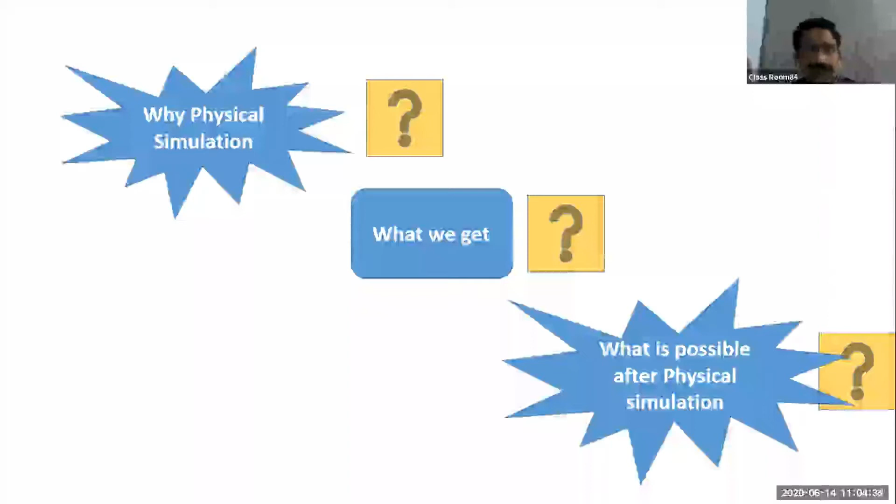First of all, I am trying to convey the information regarding why physical simulation is important and what exactly physical simulation is. Because we are all aware of FEM simulation and other kinds of simulation, but few of us are familiar with the term physical simulation. So what is the need for physical simulation?

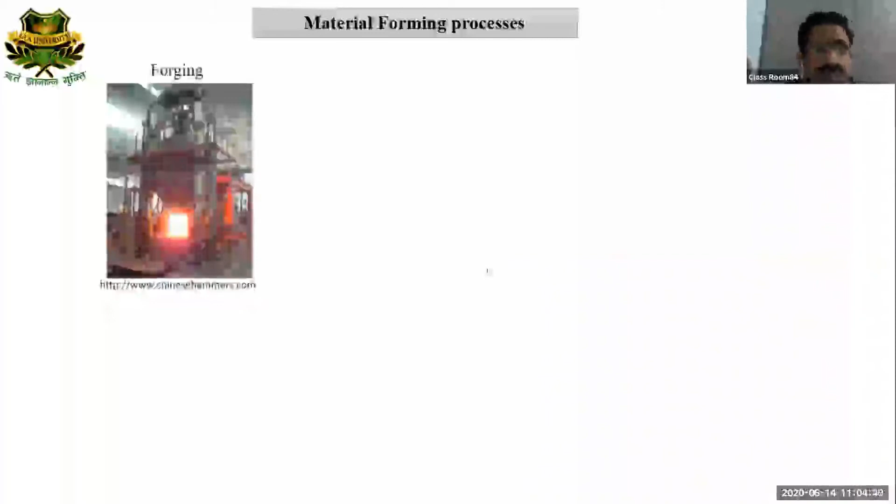On the left side, we can see a picture which shows a forging experiment at a shop floor. There is a very huge power press providing a large force on a very hot red billet. Generally, forging is used to break the as-cast structure of the material to make it a very fine structure. When we break the dendrite structure formed in casting, to enhance the mechanical property of the product, we normally go through forging.

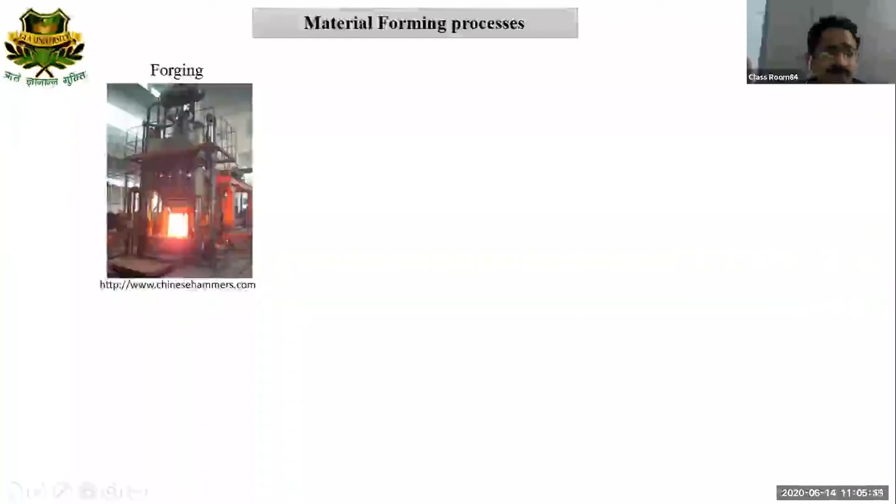In this picture it is very clear that there are a few terms: the temperature of the billet, the amount of force, and the speed of the force provided during forging. Now moving towards extrusion. Extrusion is also a metal forming process wherein we apply a force and pass our material through a die to change the dimension or shape of the material. Here again temperature is the main parameter, force is a main parameter, and the speed at which you extrude the material, known as the strain rate, is also an important parameter.

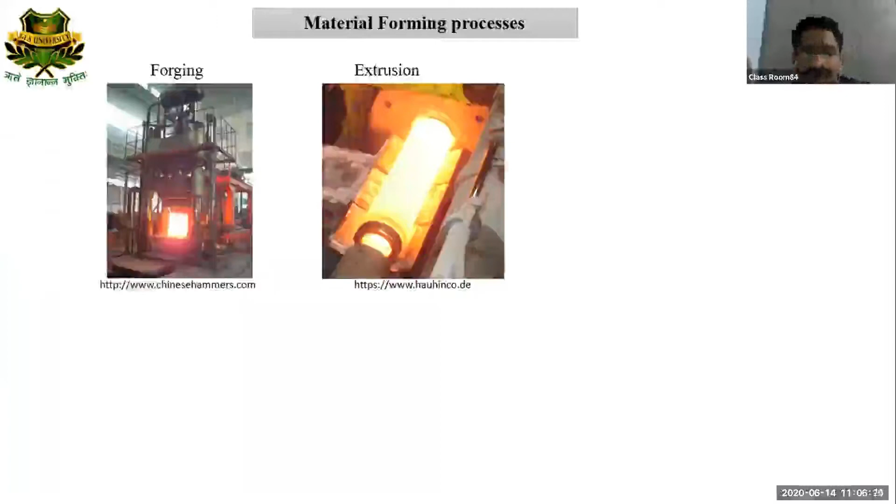Now moving towards the third one, which is rolling. All are familiar with rolling, and a lot of research is going on in rolling. In rolling we always try to reduce the thickness of a particular plate or material. Here, with the help of the roller, we can introduce force.

So here, with the help of these two rollers, we introduce the force as well as the strain rate. The main role of this rolling experiment is to convert the as-received microstructure into some new kind of microstructure to enhance the mechanical properties of the end product.

The last one is sheet metal working, because I am taking very limited examples of the material forming process. Among them, sheet metal working is there, where again we use some kind of die, and that die uses heavy force and the speed of the strain, that is known as the strain rate. So these are the main parameters again in the case of sheet metal working.

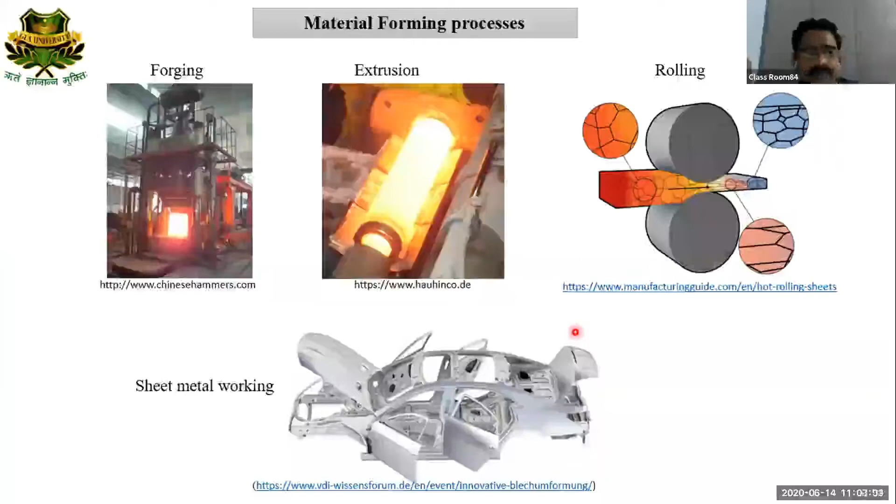So if we conclude all these pictures, we can come to the conclusion that force is a common parameter. Force is highly required for any kind of exercise. Then strain rate is the main parameter, and temperature and strain are other parameters. So here it is well written.

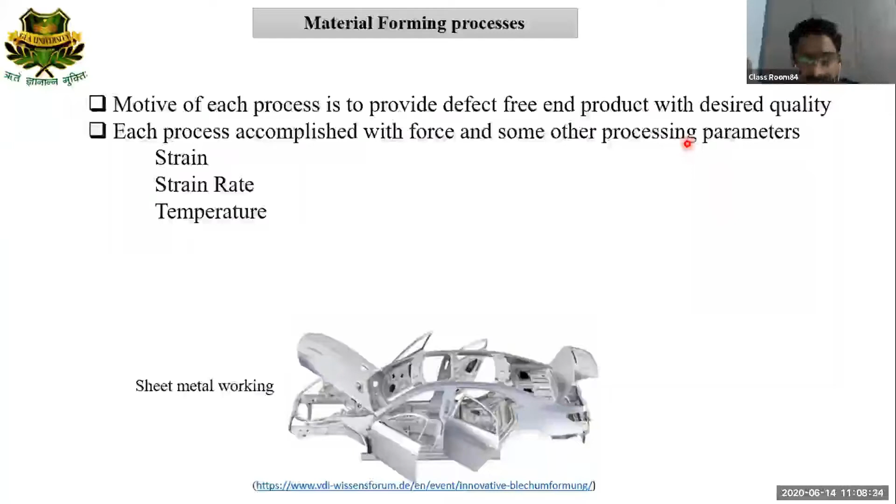That strain rate and temperature are the main concern parameters when we are looking at the material forming process, because our motive in material forming is to get an end product which must be defect free with the desired quality. So now the question is how we can get the end product which must be defect free with the desired quality or the desired properties.

In the early age, around 30 or 40 years back, normally at the industry level we were using hit and trial approaches. Later on, when we came to this simulation era, when we had very good computer peripherals, we came to know about FEM simulation. Later on, at the advanced level, from the last 10 years, we have this physical simulation concept. So these concepts are now used for the material forming process.

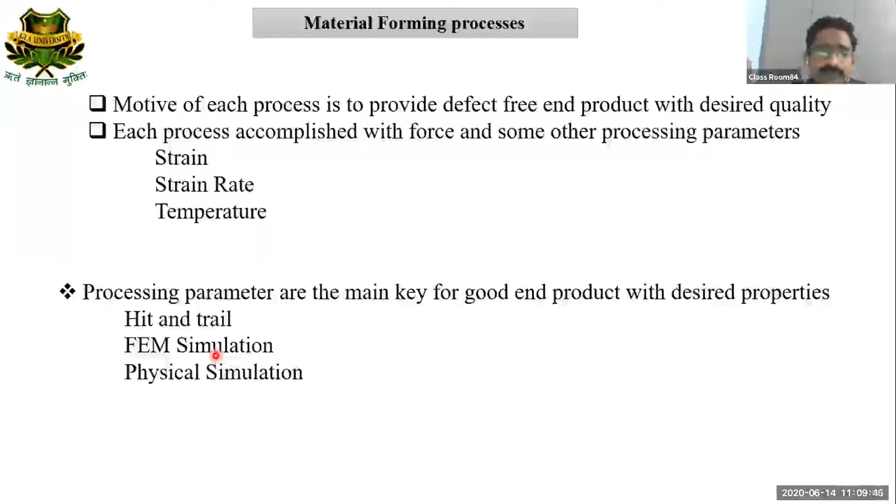The first one was hit and trial, which is now totally obsolete. FEM simulation is going on very well, and the latest way is physical simulation, which is very helpful to perform FEM simulation also, because without physical simulation no FEM simulation can be performed. Now we will go into a little detail on all three in the coming slides.

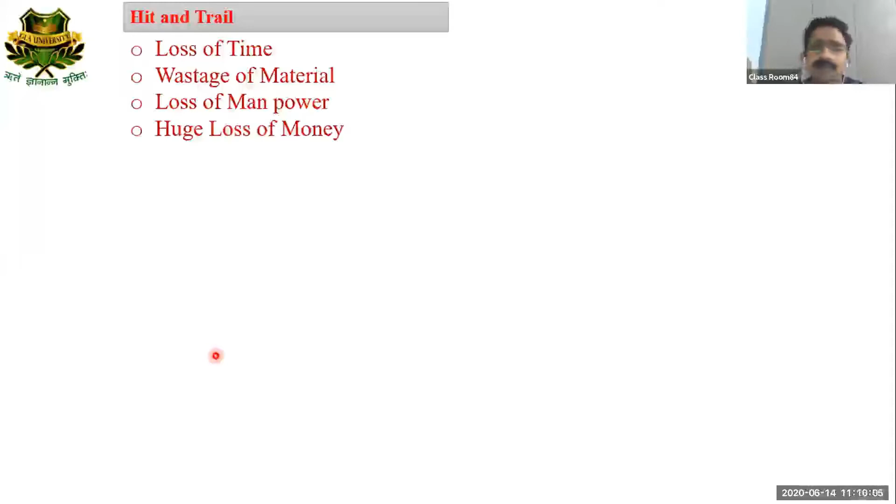So first I am going to discuss this hit and trial method for material forming. All are familiar, I hope, because hit and trial will definitely have a loss of time, wastage of material, loss of manpower, and finally a huge loss of money. So nowadays it is totally obsolete.

Now later on, if we talk about FEM simulation, some things drag it to the back foot: lots of assumptions we have to consider, and limited boundary conditions we can impose during the simulation or modeling. So that kind of modeling and simulation cannot give you the exact feel which we have at the shop floor. Somehow we have to generate approximate results.

The main drawback with FEM simulation is that if we have developed any new alloy, then FEM simulation requires the material property. So how can we get the material property of a newly developed alloy whose database is not available in the literature? This is the main concern with FEM simulation. It means we must have the material properties for which we are doing this FEM simulation. So this requirement of material property is a drawback unless we have the database of the concerned material properties.

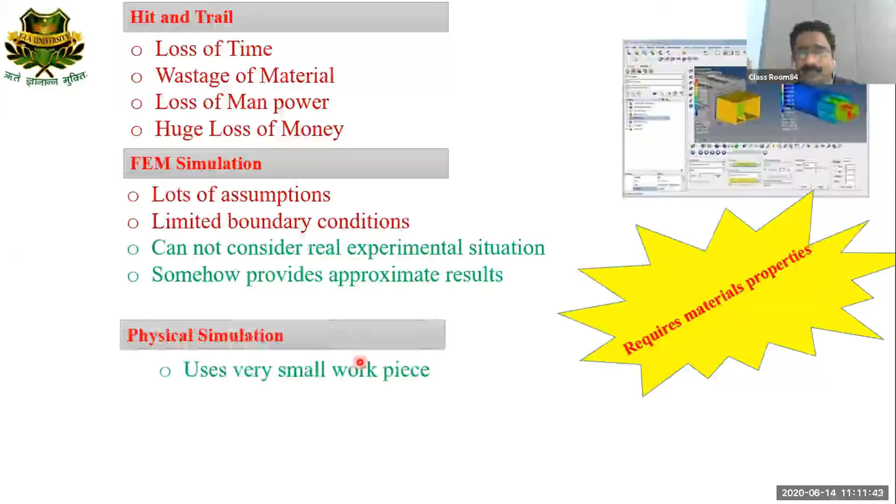Now moving towards physical simulation. A very appreciable point here is that it uses a very small workpiece. If we talk about the hot compression test, if we want to know what will happen when you forge a large billet at this temperature and this force, we can do that activity under physical simulation with the help of a very tiny sample, about 10 mm in diameter and 15 mm in height. With that we can understand what will happen when you forge the big billet at the shop floor.

So with the help of physical simulation we can do that, and in that we require only a very small, teeny sample. It provides almost similar conditions to whatever you have at the shop floor when you are doing some forging.

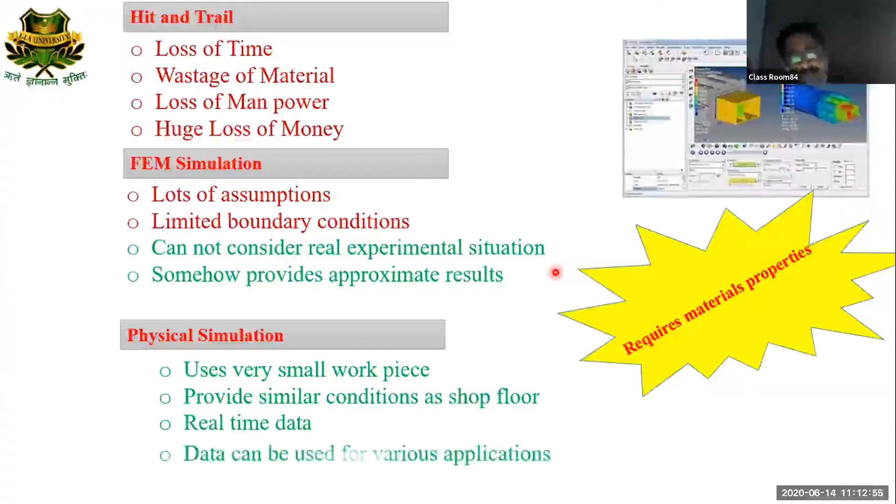With the physical simulation, some versatile machines have a very good facility to capture real-time data, and with the help of that data, further analysis can be done. Among those analyses, this data is also helpful to provide you the material property which can help you to run the FEM simulation. So in the coming slides, we can understand what is there in the data which is provided just after the physical simulation of any compression sample.

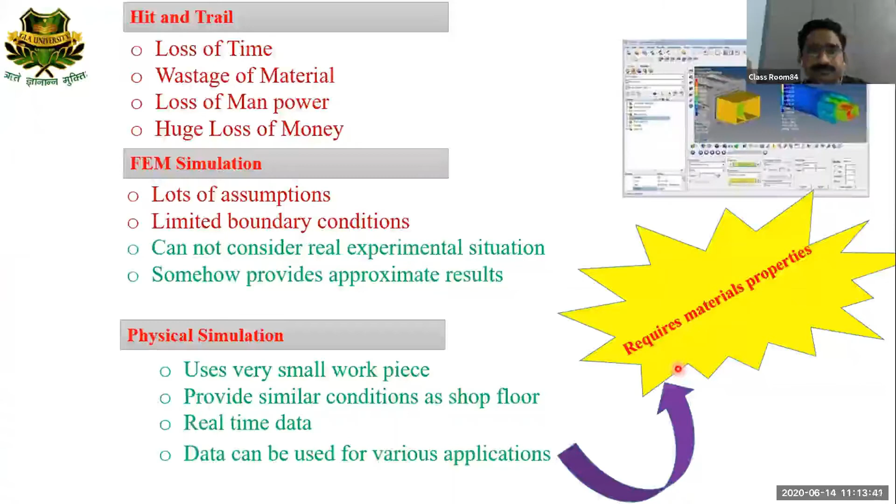So I think it is clear what a hit and trial FEM simulation is, why physical simulation comes into the picture, what the significance of the physical simulation is, and how it supports our FEM simulation. So, a little about physical simulation. Because our starting is totally focused on the physical simulation, we must know the definition or the exact words related to it. Physical simulation of material processing involves the exact reproduction of the thermal and mechanical processes in the laboratory that the material is subjected to in the actual fabrication or end use, as I have stated in the previous slide.

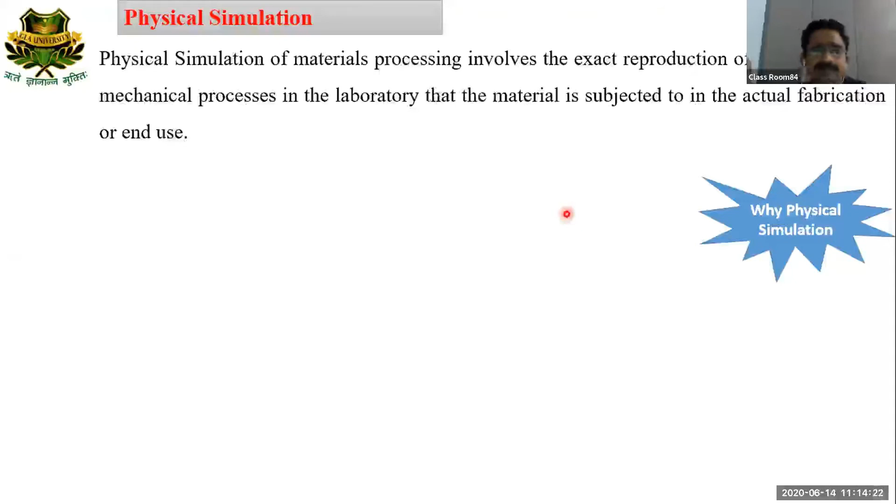Some benefits of physical simulations are as follows: physical simulation allows us to study material behavior at conditions very close to industrial processing or application. As I stated in the previous slide, from the physical simulation we can capture a lot of real-time data, and that data can be helpful for the further FEM simulation or other kinds of computer simulation, so we can say that it behaves like a bridge between computer simulation and the industrial process. It deals with real time and energy and aims to gain physical data of the process material. Material behavior data gained from the physical simulation experiment can be further used in computer modeling and control of industrial manufacturing processes.

It is almost a similar statement as I stated previously: from this physical simulation we can get the material behavior data, and that data is further used in the FEM simulation. The FEM simulation can then predict other processing conditions, meaning what kind of force, and what amount of force, we must impose at the shop floor when we are going to forge any billet. So we can have this kind of advantage just with the help of physical simulation. Thus, a large variety of microstructures and associated mechanical properties can be obtained and studied in a short time and for a tiny fraction of the cost of full-scale industrial experiments.

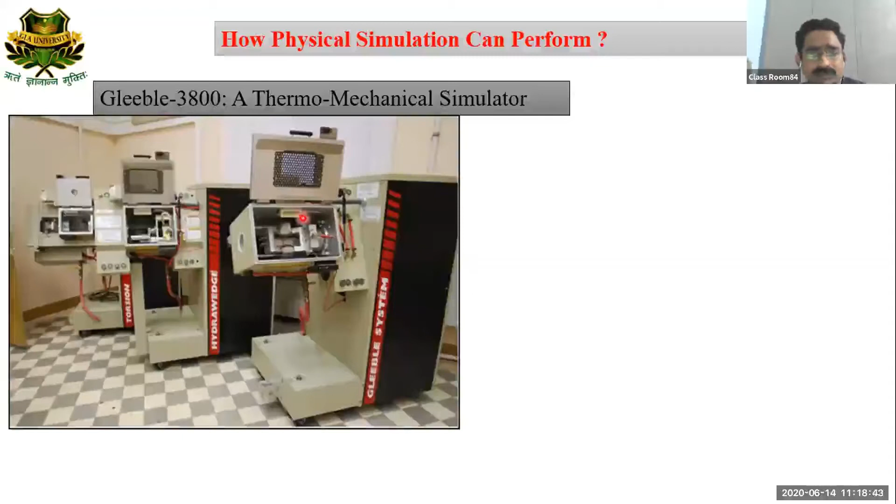But here in the Gleeble system, this is generally known as the pocket jaw unit of this system. Here, a little lower force can be applied to deform or to do any kind of physical simulation. So, in the next slide, we can understand the expanded view of this working chamber.

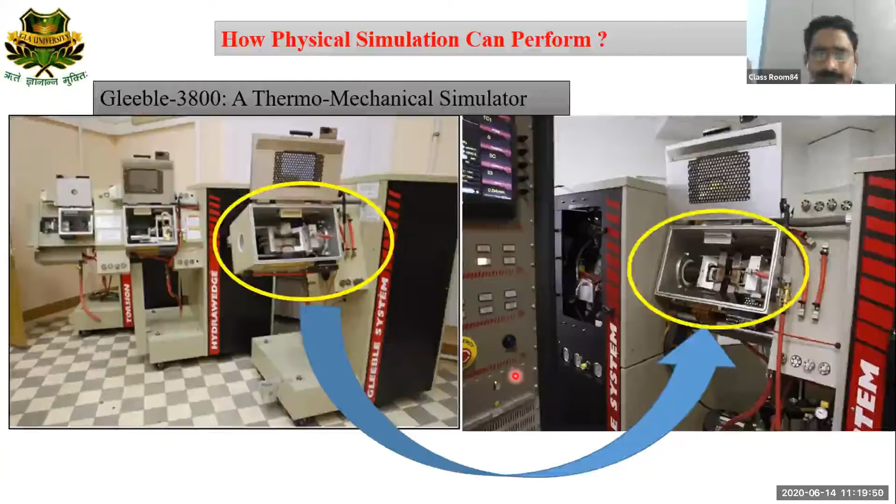Now, another expanded view of this working chamber. You can see the jaws on both the left side and the right side. In between, you can see the sample, which has a dimension of 10 mm in diameter and 15 mm in height, looking just like a red hot rod. Just above it, two wires are going on. These two wires are known as thermocouples, which are already welded to the sample. It is a kind of spot welding.

Another unit for welding is there with the Gleeble system. So at the start of the experiment, we usually weld these two thermocouples to the sample. Then we start our hot compression test. With the help of these two thermocouples, we can capture the real-time temperature of the sample. So really, it's an appreciable machine which has a versatile capacity to do various kinds of experiments.

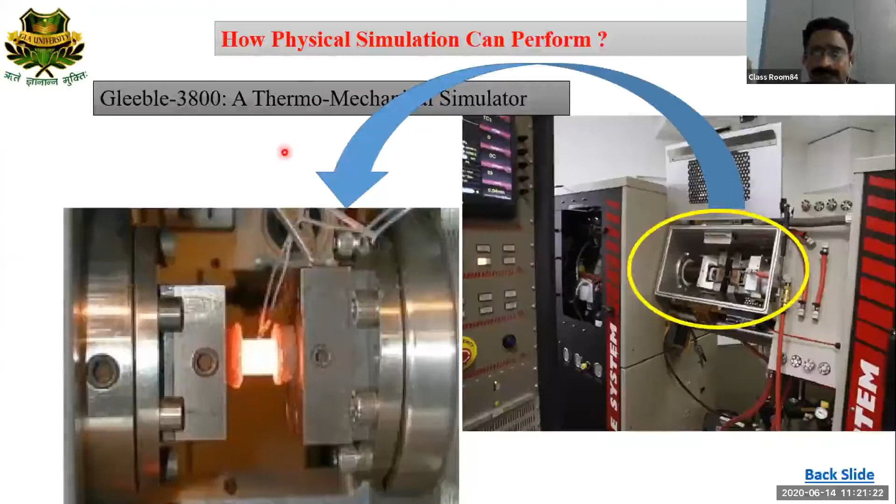More about this particular thermomechanical simulator is available on their website. If you want to know more about this thermomechanical simulator or Gleeble 3800, you may feel free to visit the DSI website. Now coming to the next one: what are the specifications of this Gleeble 3800?

With the Gleeble 3800, we talk about the force. The maximum compressive force it can apply is up to 20 metric tons. Maximum tensile force is also 20 metric tons. Maximum stroke distance is 125 mm. Minimum stroke rate is 10 to the power minus 3 mm per second. That means if you want to compress a sample very slowly, that slow movement is around 10 to the power minus 3 mm per second. In 1 second it can compress only 10 to the power minus 3 mm. This is the capacity of this particular equipment.

Now about the temperature. The maximum temperature it can reach is up to 3000 degrees centigrade, and it has the capacity to raise the temperature by 10,000 degrees in a second. As well, the quenching rate we can control is around 10,000 degrees centigrade per second. Maximum specimen size is 20 mm in diameter. This is the maximum specimen size for all kinds of experiments.

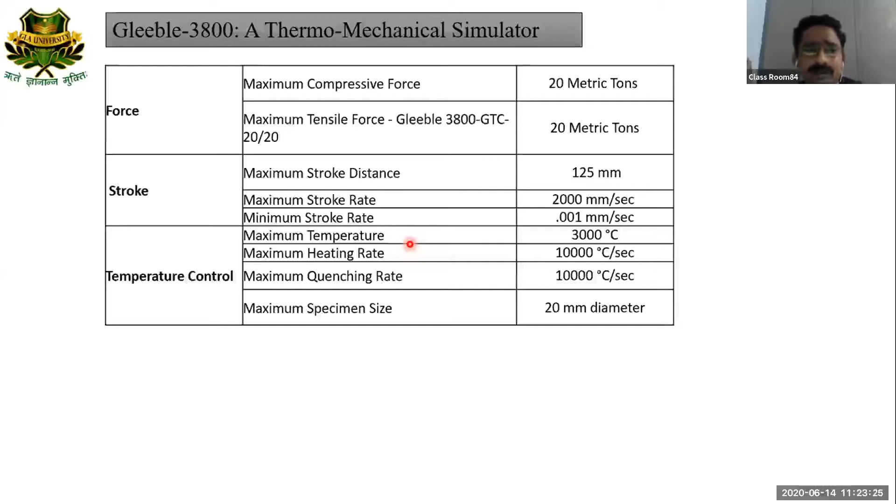I'm not considering it for the hot compression test, because in the hot compression test there is a standard that there must be a ratio of diameter and height. If you consider the diameter as 1, then the height must be between 1.2 and 1.5. For example, if the diameter is 10 mm, then the height must be between 12 mm and 15 mm. This is the standard size recommended by the Gleeble system.

Now, in this list we can know what kinds of experiments can be performed with the help of this thermomechanical simulator: process simulation, continuous casting, hot rolling, continuous strip annealing, forging, heat treatment, powder metallurgy, sintering, extrusion, weld HAZ, upset butt welding, diffusion bonding, and hot deformation. I don't know about all the other experiments. I have knowledge of hot deformation, which is performed on this Gleeble 3800. So we'll consider all the experiments related to hot deformation. We will explain in the further slides. Now, talking about hot compression, which is also known as uniaxial compression.

Because if we talk about hot compression, there are two kinds of tests. One is known as the uniaxial compression and the other is known as the plane strain compression. Both are totally different, physically totally different, and will definitely provide different kinds of microstructure or other properties. So we are going to discuss this hot compression, or in other words, the uniaxial compression test.

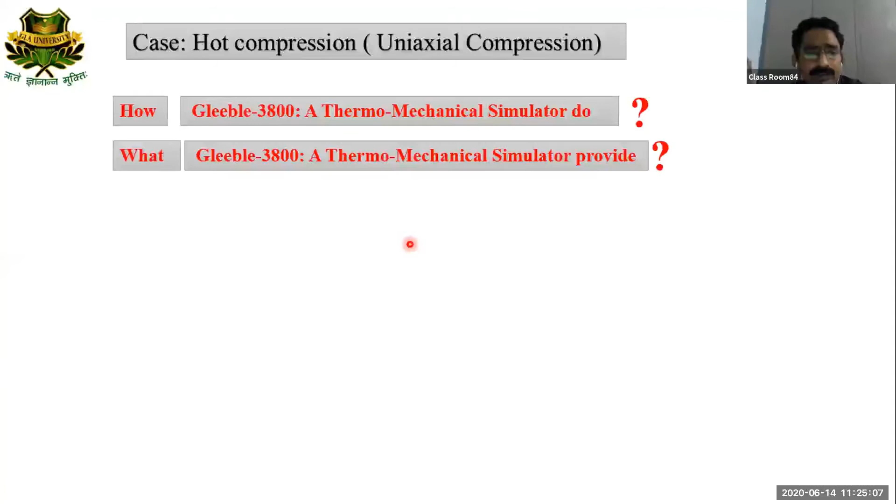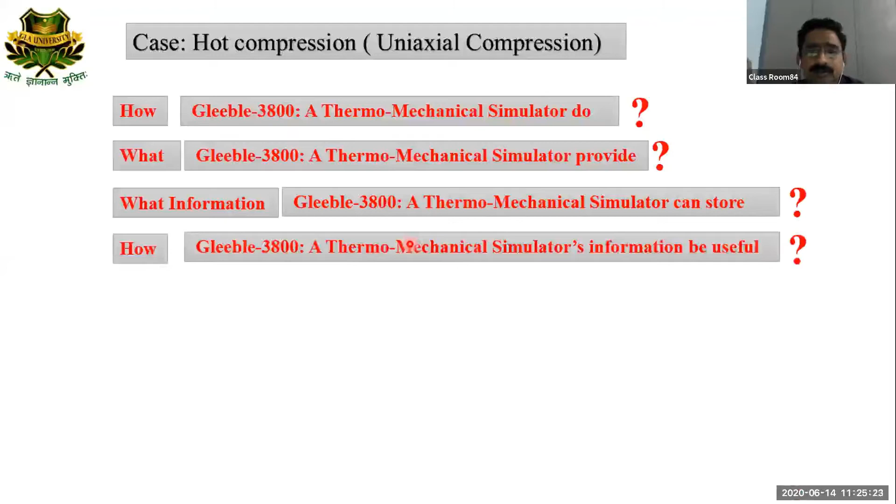So the first question is how the Gleeble 3800 thermomechanical simulator works. Another question is what the simulator provides, what information can be stored with the help of the simulator, and how this information will be useful for other applications. So in the case of what the simulator will provide, the simulator will provide two things.

One is known as data, which we discussed in the previous slide, and in a further slide I am also showing what information is there in the data. Along with the data, we will have a processed sample, or we can say a deformed sample or a compressed sample after the simulation. So one thing is data, the other is the processed sample or the deformed sample.

Okay, so now if we look at the data, a table is shown here in the slide. With the help of this table, I can tell you that a lot of parameters can be captured while you are performing a hot compression test with this thermomechanical simulator. Here you can see that TC1 is the thermocouple 1 temperature. It means the real-time temperature of the sample when you are performing your experiment.

And in this particular column, where it is written as P temperature, it means program temperature, meaning what temperature you have programmed versus what exact temperature is there in real time on the sample during compression. With the help of these two, you can compare whether the temperature of the sample is according to your program or not. Here, don't worry about whether P temperature is equal to TC1, because it is a very early stage of this compression test. Till this position, the test has not started. It is an initial preparation time.

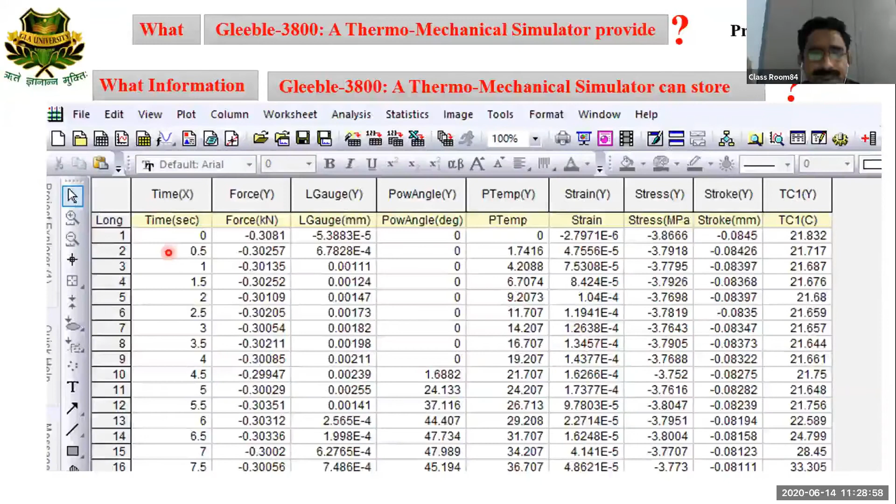So now we have the data from the thermomechanical simulator. Now what can we do with the data? What kind of analysis can we perform with the help of the data? Here we can develop the processing map with the help of the data which we obtain from the thermomechanical simulation. In this case, I am fully focused on the hot compression test, not other kinds of experiments.

So when you perform any kind of hot compression test, you will have data in terms of true stress and true strain, temperature, strain rate, etc. From that data we can develop the processing map. We can also develop the constitutive equation. We can also get the microstructural characterization, not from the data but from the deformed samples. So these are the things which we can obtain or perform after the physical simulation.

These first two terms are totally based on the data we get from this thermomechanical simulation, and the last, which is known as the microstructural characterization, we can do on the deformed sample which we obtain after the experiment.

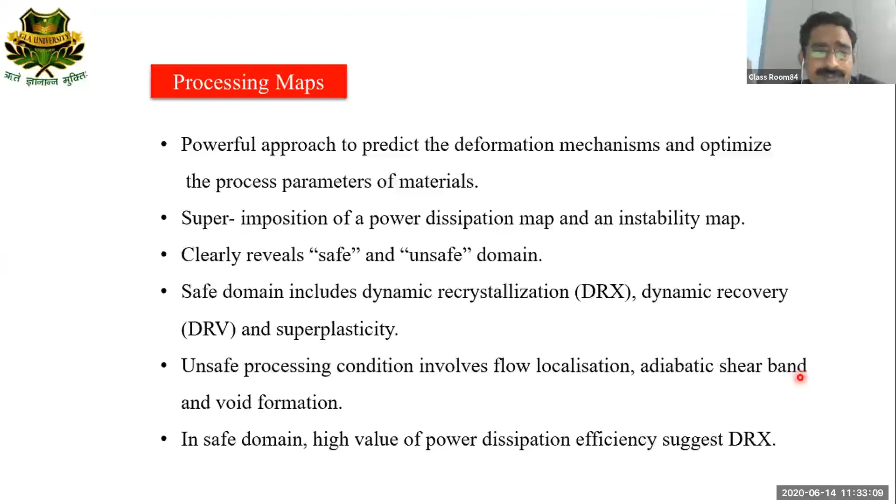So this is the processing map and this is the beauty of the processing map. But now the question is how we can develop the processing map. In literature, three methods are there. One was developed by Professor Y.V.R.K. Prasad of IISc Bangalore, India, and they named this processing map the dynamic material model. Later on, Professor Murthy, a scientist at ISRO Trivandrum, modified the existing model a little and named it the modified dynamic material model.

Another one, based on the strain hardening concept, was developed by Jonas and Semiatin, and is known as the alpha parameter. But usually if you search the hot deformation behavior of any material, whether aluminum, magnesium, titanium, or zirconium, you will find that the DMM model is best suited for deformation prediction. I'm not going into the detail of all these models, the dynamic material model, modified dynamic material model, or alpha parameter.

I will tell you a little about the dynamic material model developed by Y.V.R.K. Prasad et al. Initially they assumed that the total power you impose on the sample with the help of a thermomechanical simulator or any kind of machine, though they didn't use a thermomechanical simulator in the early stage of their work, is distributed in two parts. One is termed G and another is termed J.

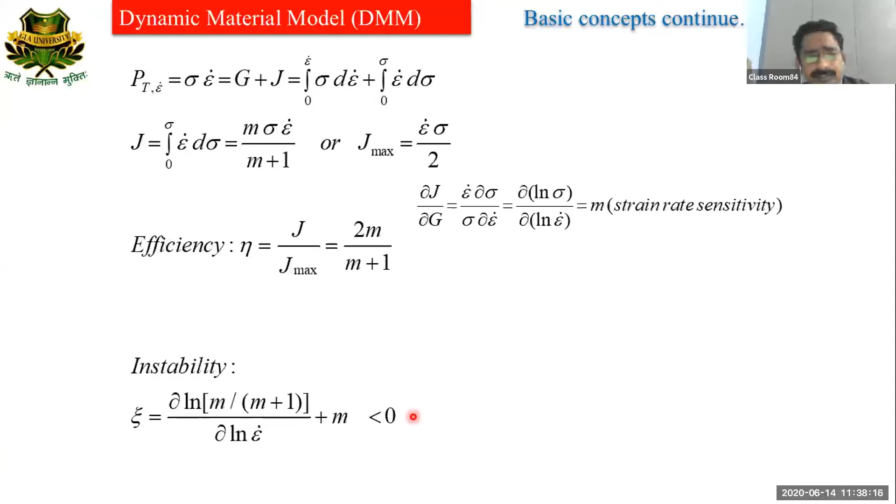Now, how can we calculate the power dissipation efficiency, which helps to identify whether there will be a DRX or a DRV? DRX is dynamic recrystallization, and DRV is dynamic recovery in the microstructure. And how can we get the instability? For instability, they have developed this particular equation and assume that the value of this particular term must be less than 0. With the help of this efficiency and instability value,

one can develop the processing map to get the safe domain and unsafe domain, and to know what the maximum efficiency could be. Here on the right side you are seeing a single picture, but in fact it is a superimposition of two maps. One was the power dissipation map and the other was an instability map. The power dissipation map is a contour map. Here you can see contours with numeral values on the axes of temperature and log strain rate. This contour map is known as the power dissipation map, and the box which has only the shaded domain is the instability map, on the same axes of temperature and strain rate.

When we superimpose both maps on each other, only then will we have the processing map. The superimposition of the power dissipation map and the instability map gives you the processing map. When you have completed your processing map, you can understand that here it is 0.42, meaning 42% power dissipation efficiency, which is the maximum efficiency. So the processing map predicts that this is the domain where DRX in the microstructure of the deformed sample can be possible.

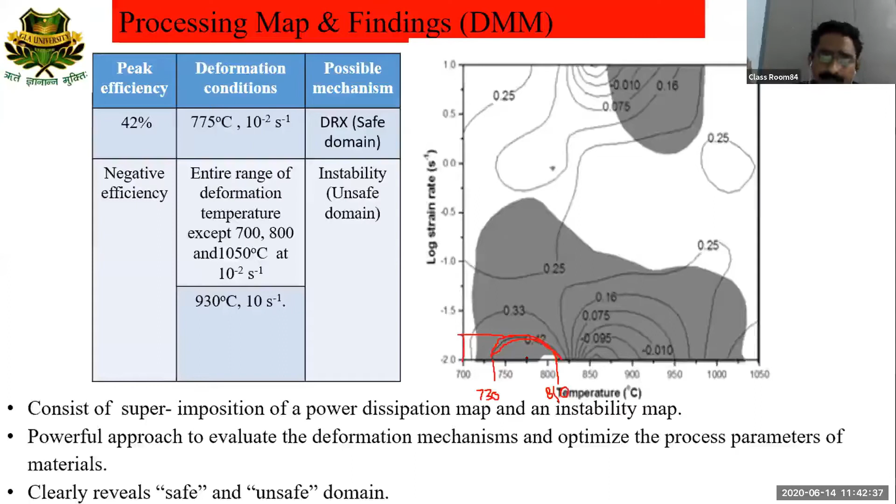So little information about the quantification, which is another kind of approach developed with the help of the data obtained from the thermomechanical simulator. Okay. So from the thermomechanical simulator, if we are compressing a particular material or doing hot deformation, normally we have the temperature, the strain rate, the stress, and the strain. With all these data, we can develop an equation which is known as the constitutive equation.

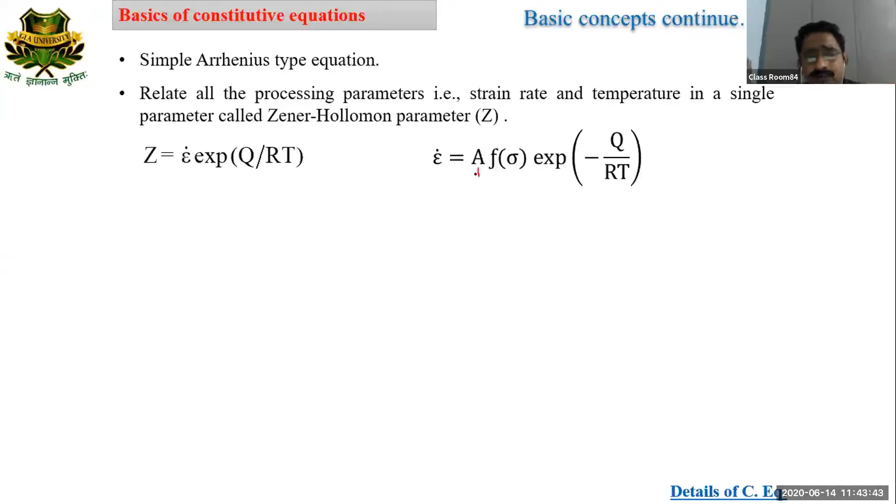The constitutive equation is a kind of Arrhenius type equation wherein the Zener-Hollomon parameter, known as Z, combines or binds up the strain rate and temperature in a single parameter, that is Z. Okay, so here we can see the equation that Z is equal to the strain rate times exponential of Q by RT. And further, if we simplify this equation, we can write the strain rate is equal to some constant function of flow stress and then exponent of minus Q by RT.

Okay, so here we can split this particular constitutive equation into three terms. One is known as the power law kind of, one is exponential kind of, and this is known as sine hyperbolic, or somehow it is also known as the universal kind of constitutive equation. Okay, so now the question is, if we have classified three kinds of constitutive equations, what is the use of all three? So here I would like to tell you the power law kind of equation is useful when you have a very low flow stress. Whereas in the case of moderate stress, we can use the exponential one, and for all kinds of stresses, we can use the universal or sine hyperbolic kind of constitutive equation.

Normally, this equation is used in the case when we are doing a kind of creep test. Okay, so the flow stress or the stresses obtained in the creep test can be used in this particular kind of constitutive equation. But in the case of hot deformation, when we are going to develop any constitutive equation, we have to use all three equations, because to calculate the parameter known as alpha, we are in need of both the equations. So how we can calculate the alpha, we will see in the further slides.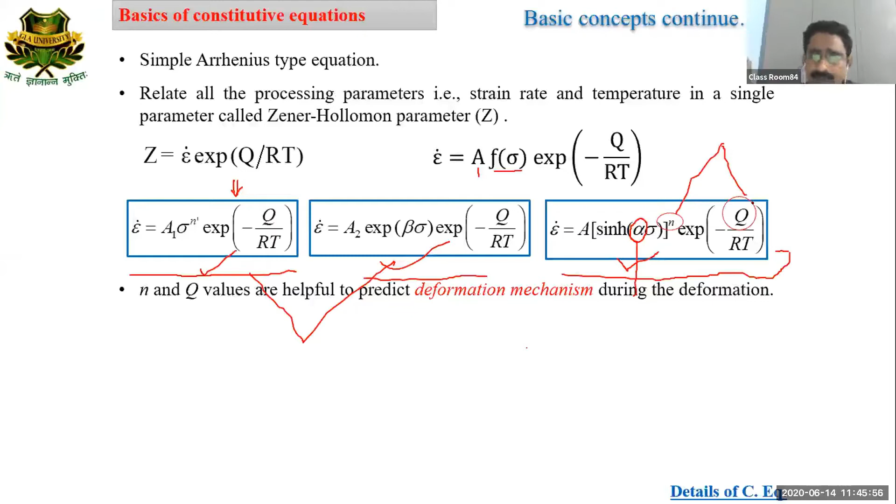Okay, so what is the use of this particular constitutive equation? Means what we will get after developing this constitutive equation. So here, with the help of n and with the help of Q, where n is the stress exponent and Q is known as the activation energy, these two parameters are also helpful to predict the deformation mechanism which was dominant during the hot compression test. Okay, so with the help of the value of n as well as Q, we can tell a lot of information about the material behavior.

Further, what happened? For example, I have done a few tests of hot compression. For example, I have done at 700 degree centigrade at 10 to power minus 3, 10 to power minus 2, 10 to power minus 1, and 10. Okay. So at limited processing parameters, I have done my experiment, and somehow I am in need of data on which I have not done the experiment. So I have done the experiment between 700 to 1000 with a difference of 100 degree centigrade. It means 700, 800, 900, and 1000.

Okay. So at random, if I am in need of flow stress or hot compression data at 850 degrees centigrade, we can generate the data with the help of this constitutive equation. Now the question is how we can generate the data. Okay. So first of all, we have to establish the constitutive equation based on the data we have from our processing matrix. Processing matrix means what conditions you have done your hot compression test. Okay. So we will do some mathematical analysis, and later on we'll simplify all these equations. We'll get some values of n dash, some values of beta.

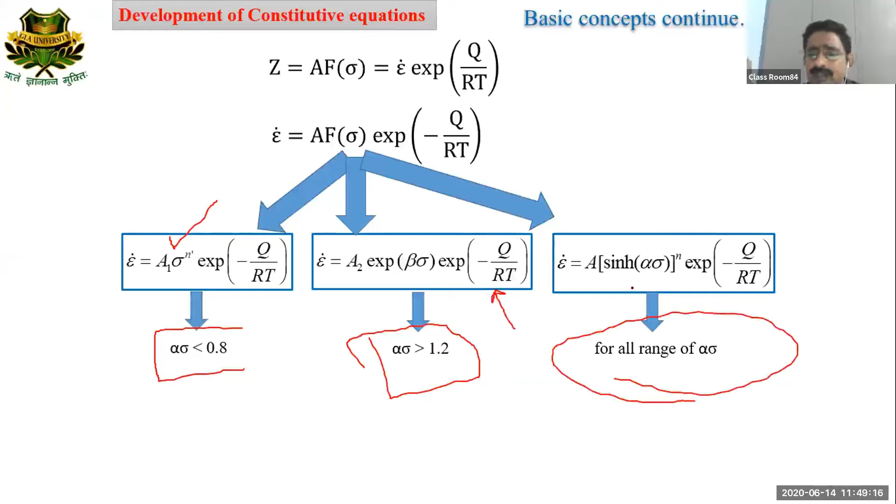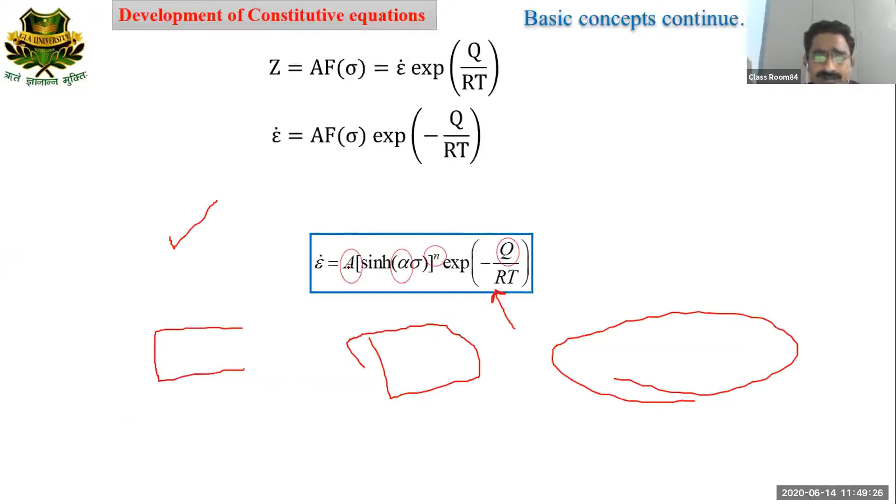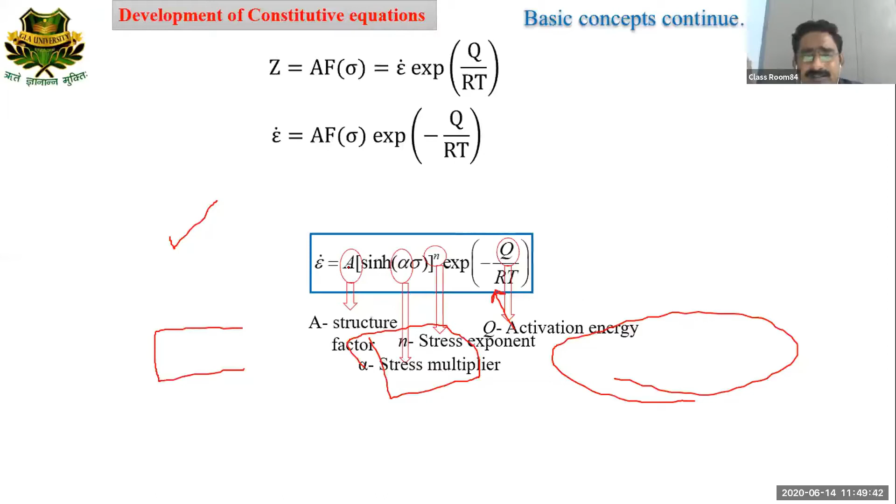So now the question is, how can we calculate all these parameters: structural factor A, alpha, which is known as the stress multiplier, n, the stress exponent, and q, known as the activation energy. These are the four parameters we have to calculate. We have to do a little analysis to get these values. To calculate this alpha, we must have the values of beta and n dash.

So how can we get the values of beta and n dash? We can calculate n dash from here, just by simplifying this particular equation. And the beta value we can get from this equation, just by simplification. Now, talking about n dash, it can be generated with the help of the differentiation of ln strain rate versus ln flow stress. With the help of this we can get the value of n dash.

Similarly, we can get the value of beta when we plot our data between ln strain rate and flow stress. With this sine hyperbolic constitutive equation, we can generate the value of n as well as the value of q. When we plot our data in terms of ln strain rate versus ln sinh alpha sigma, then we can get the value of n. But it is to be noted that in this condition the temperature must be constant. In the next case, when you are calculating the value of q and nR, the strain rate must be constant and you have to plot your data in this particular term.

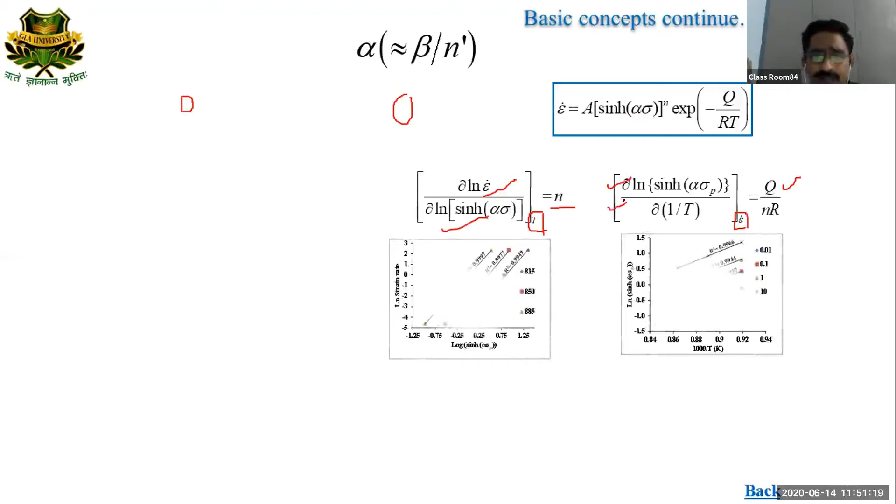So with this we can have the values of all the parameters, and by putting them in our equation, we can generate our standard equation to recalculate or generate any data which was not performed during the simulation. So this was all about the constitutive equation and the processing map. This is what we can develop after the thermomechanical simulation in the case of hot deformation.

Now I am going to consider a particular material, zirconium-1 niobium, and the as-received condition of zirconium-1 niobium was the extruded beta quenched. Before proceeding to the next slide, I just want to inform you that few of us are familiar with the zirconium-niobium alloy, and a lot of you are probably not aware of it.

So let me explain a little bit about this zirconium and niobium alloy. It is almost similar to titanium-64, meaning titanium-6-aluminum-4-vanadium. Why am I introducing titanium here? Because Ti-6Al-4V is the most popular and most versatile kind of alloy, and is used in many applications in aerospace, in automobiles, and in dentistry. This titanium is very well applied.

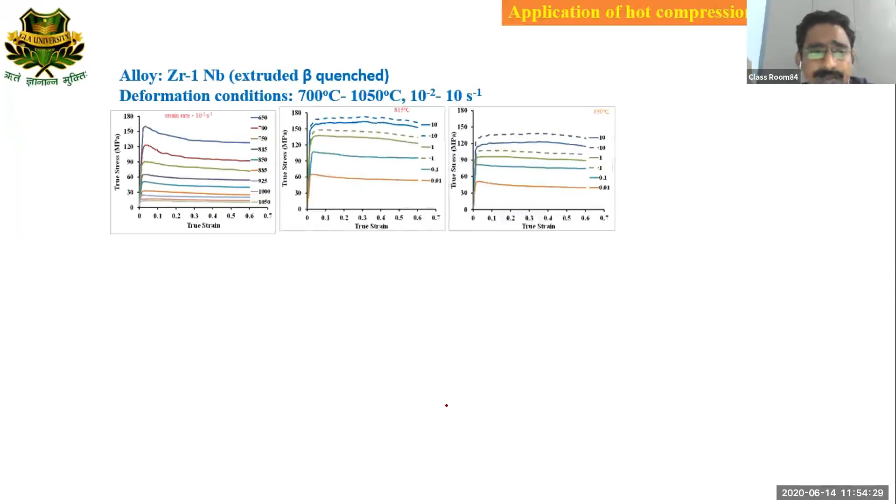So here you can see one picture. It is a true strain diagram at a strain rate of 10 to the power minus 2 for different temperatures. The left side figure is at constant strain rate, 10 to the power minus 2, and the right side middle picture is at constant temperature for various strain rates. These dotted lines are also the values of flow stress data, but adiabatically corrected. I am not going into the detail of what adiabatic correction is, because we are lacking time and I have a lot of information.

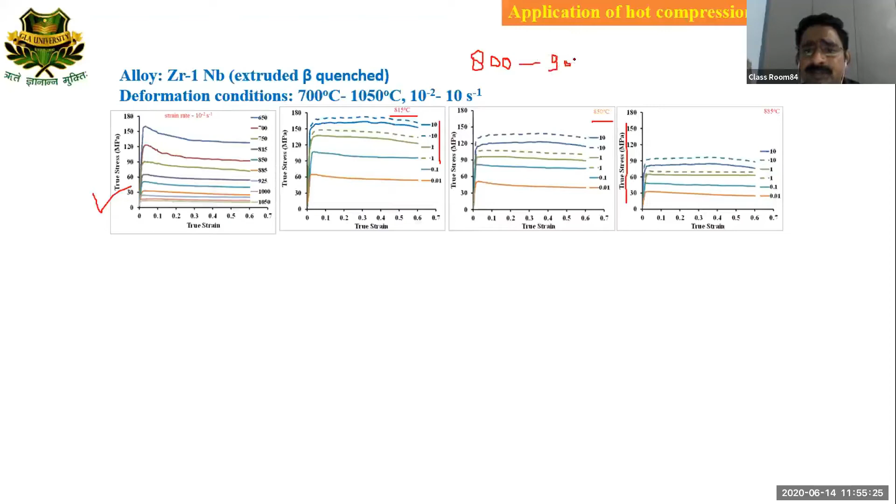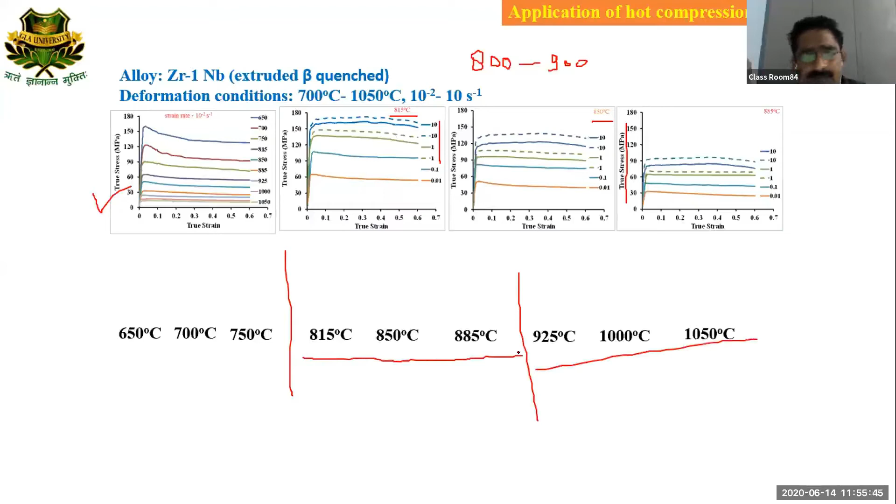So here you can see 815, 850 and 885. I have told you that this particular alloy has a two-phase domain between 800 and around 900 degrees centigrade, meaning in this domain the alloy has HCP as well as BCC structure, so the alpha phase is there and the beta phase is also available. Here I have made some partitions: this is the beta phase temperature where I have done deformation, this is alpha plus beta phase deformation, and this is the alpha phase deformation. So I am focusing only on these three temperatures, which lie in the two-phase region.

Now the question is why I am considering this two-phase domain. I am considering it because on the industry shop floor this alloy is normally processed in the domain where two phases exist, because we have to control the microstructure as well as the mechanical properties. With the help of these processing parameters we can control the proportion of alpha phase as well as beta phase. That's why I am focusing on this temperature range, which lies in the two-phase domain. So it is well written: alpha phase, two-phase and single beta phase.

So what I am going to do is establish a particular constitutive equation. Please listen carefully because it's a very unique discussion. The parameters of the established constitutive equation will be further used in some FEM simulation to predict the ram force, which will be further used on the shop floor at NFC Hyderabad. Correct? So I am just going to develop a constitutive equation which covers the whole temperature range.

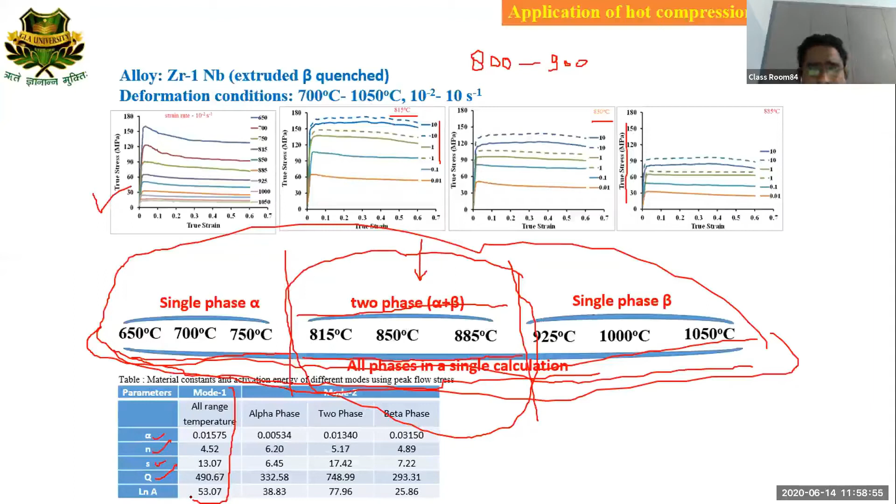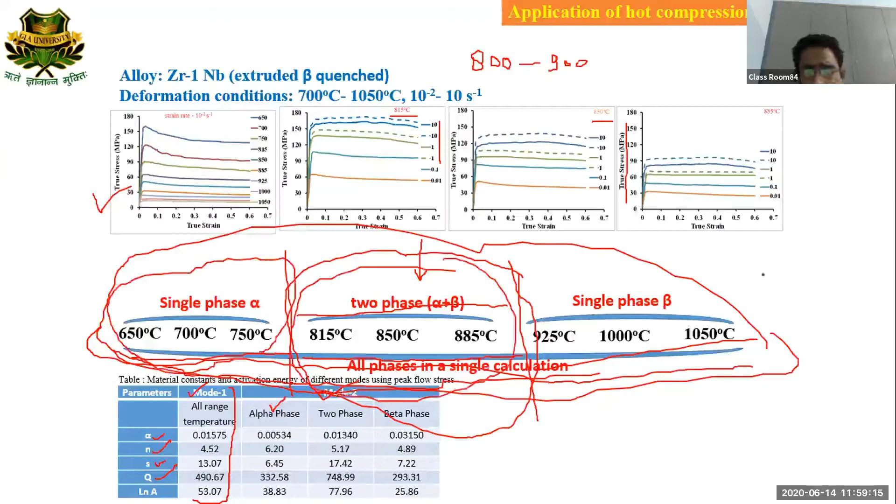Here I am giving the values of the parameters which I have calculated for the development of the constitutive equation. So alpha is here, n is here, s is here, Q is here, ln A is here. Mode 1 is a parameter set developed from the data without bothering about the phases, meaning all deformation parameters and all deformation temperatures taken in a single range and termed as mode 1. In case of mode 2, I have individually developed the parameters for the alpha phase, for this particular region, the two-phase region, for this particular region, and the beta phase for this particular region.

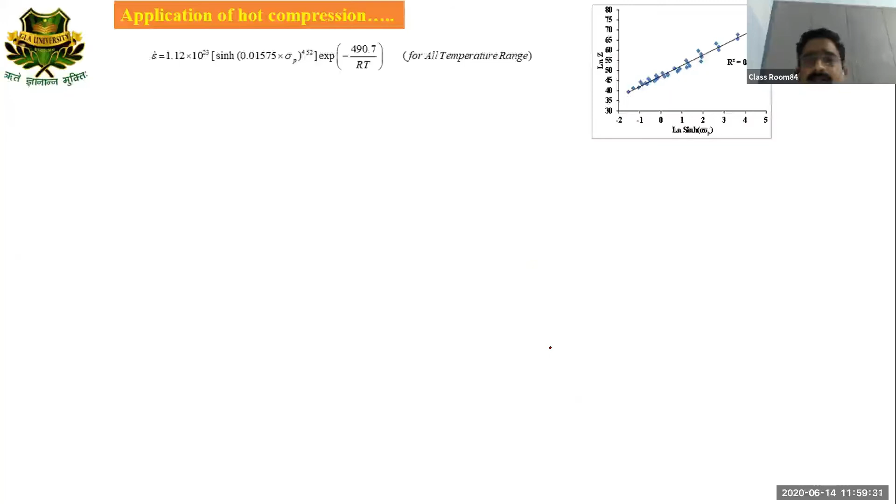So now I have done this calculation, put all the parameters back into the equation and calculated the ln Z value. With this regression analysis I have checked whether our calculation is okay or not. You will see and appreciate that when you are considering all temperatures in a single range, then your R square value is around 0.96. But when you are considering a particular phase, you will see that your R square value is

approximately 1. Okay, and in the same way, if you talk about the two-phase, means if we are developing our constitutive equation, in short, I just want to conclude here. If we develop our constitutive equation phase-wise, we get an R square value almost equal to 1. Okay, this shows that if you are covering all the temperatures, means all the phases, in a single domain, it will not give you fruitful results as compared to the single phases.

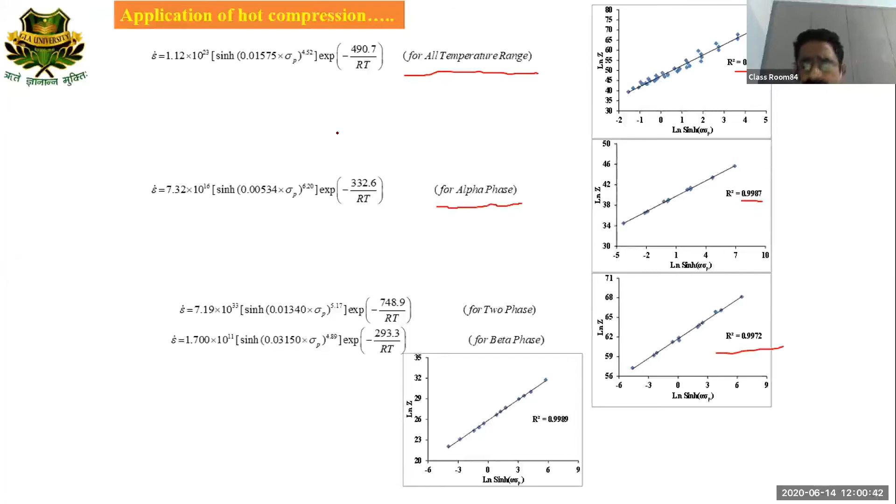Okay. So now, the equations from the previous slides, whatever Q we have, whatever A we have, that information I am going to use to simulate an extrusion experiment with the help of an FEM simulation. The software used for this simulation is known as HyperExtrude, and the licensed version of this software is available with Nuclear Fuel Complex, Hyderabad. Okay, so this work was done over there.

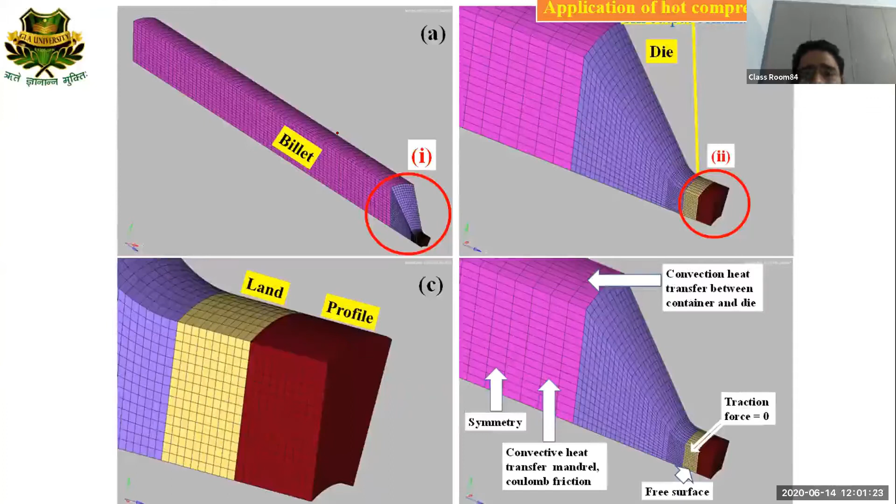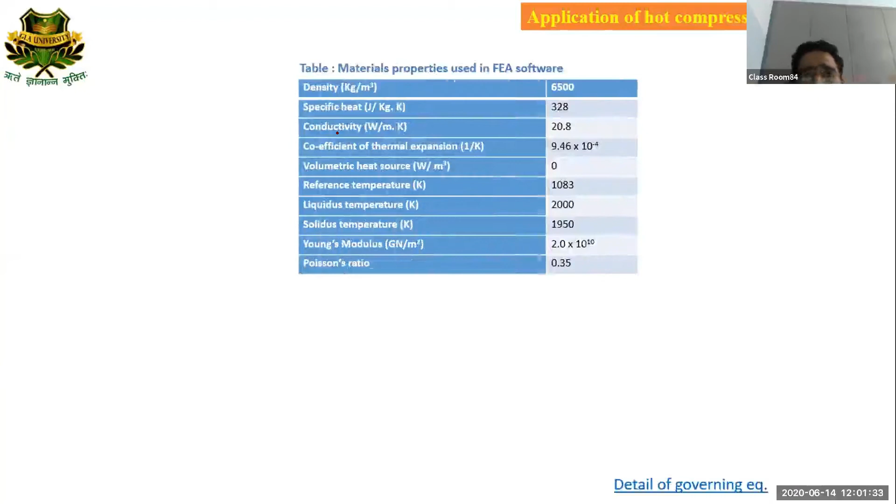So we have modeled this particular tube and applied some boundary conditions. The main point which I want to convey here is that during this simulation, the software requires the material property, and material property means the behavior of the material. So what we have done, we have given the material behavior in two or three ways. The first way is we have given the whole data of stress and strain as per the processing condition, which is known as the lookup table. So, in the lookup table, I have fed all the data into the software.

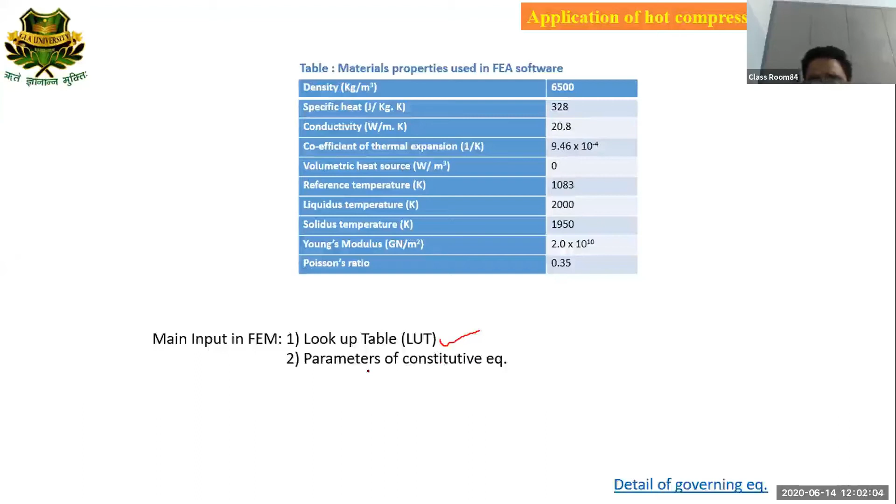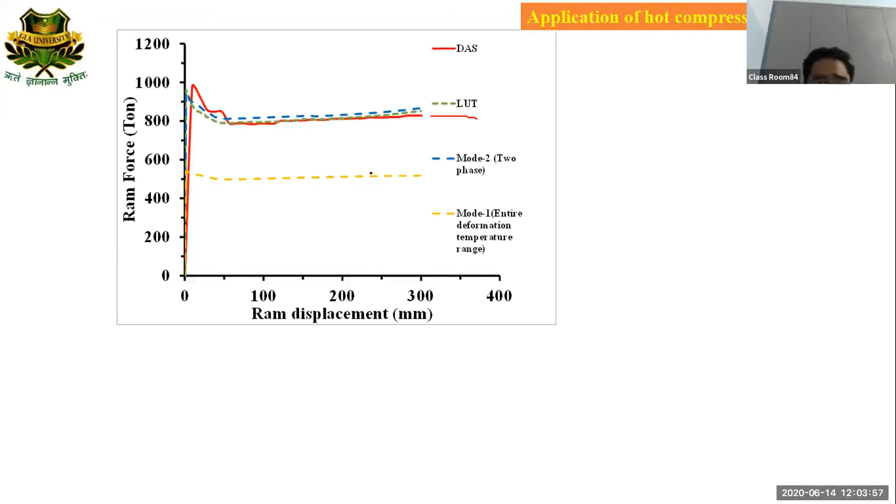Okay, so finally it is completely understood that when we are considering the entire deformation range in a single domain, we are very much away from the real data. Real data is DAS data, experimental data at the shop floor. We are very much away. But when we put in the lookup table, means the raw data which we obtained from the thermomechanical simulation, and directly fed it in, then we are very much close to the DS data. And similarly, when we have given the information in terms of constitutive equation parameters developed only in the range of mode 2, or only for the 2-phase region, that is also very much close to the DS data.

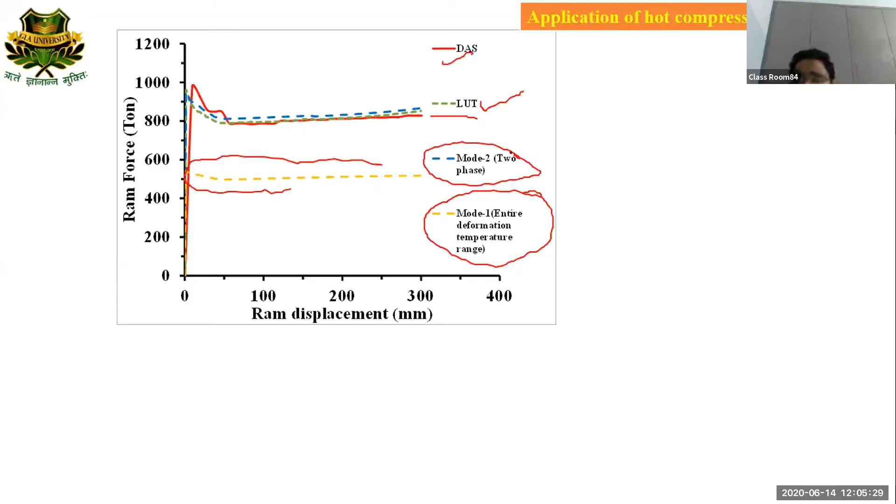Okay, so this means we can get twofold information from here: that physical simulation data can be processed in many ways, and those many ways will further extend to some other simulation and modeling purposes. Okay, as you have seen here, I have done a compression test. I have taken the data of those compression tests and reshaped the data in the form of the constitutive equation or the lookup table, and then fed that information into FEM simulation software to simulate an extrusion kind of experiment. I think it is clear.

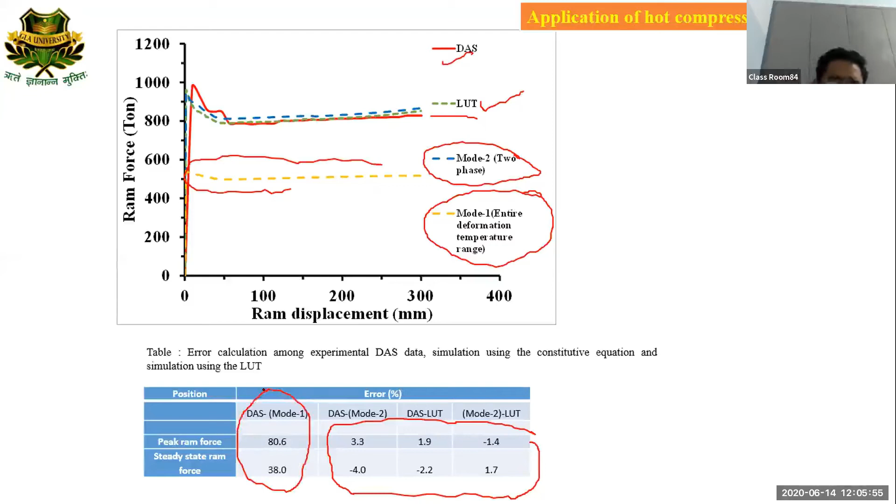So here you can see what kind of error we have in between. Okay, so it is appreciable that it is a single digit error, around 3%, -4%, 2%, 2%, 1%, or 1%. But when we have this entire temperature range in a single data set, then there is a huge difference in peak ram prediction as well as steady state ram prediction.

So actually I have a lot of information here, but the time is actually 12. So okay, just taking 10 minutes more.

Now I'm going to show you another unique kind of work with the help of this thermomechanical simulator, because in the case of the thermomechanical simulator you are using a 10 mm diameter and 15 mm height sample. So you can assume what will be the size of the deformed sample. Very small at the end, and from that deformed sample it is very difficult to make a tensile sample. Even a miniaturized tensile sample is very difficult. We have tried but could not succeed.

So what have we done? We have made a small punch test to know the mechanical properties when we have the deformed sample. Here we are again considering the zirconium 1 niobium alloy, but the as received condition is a little different. That is, the beta phase followed by annealing in the single alpha phase. Deformation range is 650 to 1050 degree centigrade with some interval of temperature. The strain rates were 10 to the power minus 2, 10 to the power minus 1 per second, 1 per second, and 10 per second. We have controlled the cooling rate at 1 degree per second within the Gleeble system, known as controlled cooling, correct?

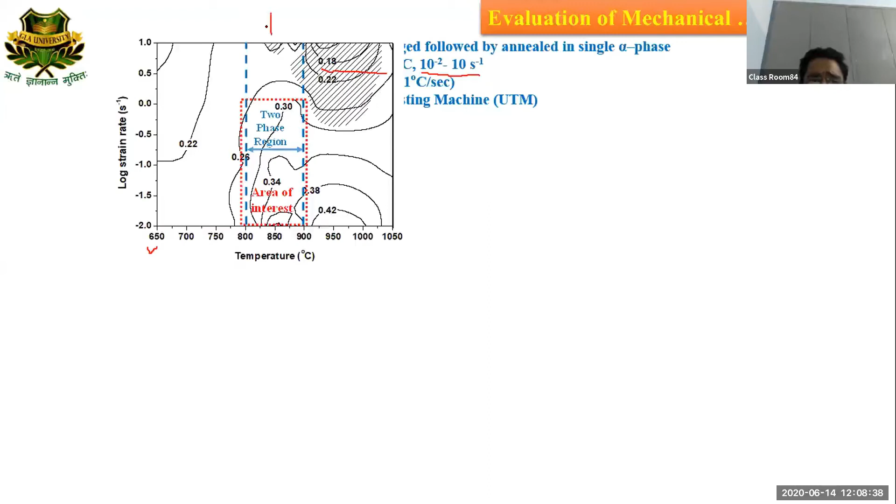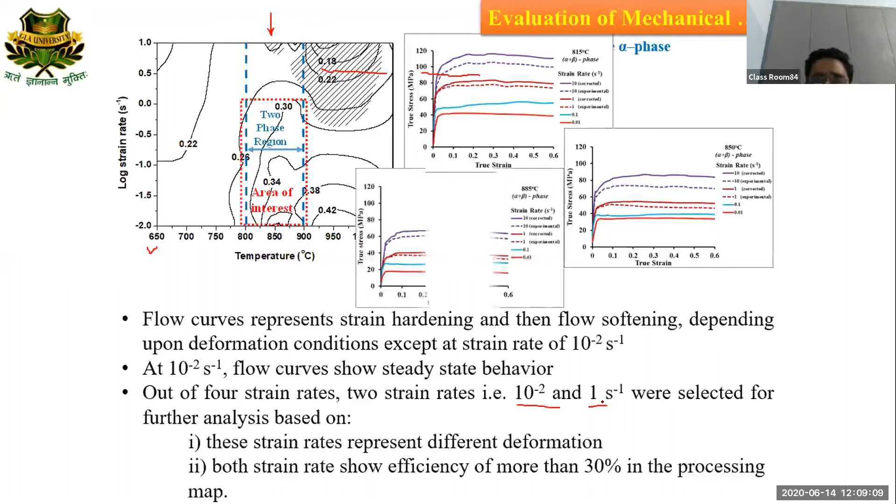Some of you may be familiar with the small punch test and some of you may not. The small punch test is just like when one disc is pushed with the help of a steel ball, and that steel ball is pushed by a plunger. So it is a sheet forming kind of experiment, known as the small punch test. It is also done at one of the departments of BARC, the post irradiation department. Dr. Kulkarni was there, who helped a lot to perform this particular experiment.

With that experiment we got such results, yield load and maximum load, and I have plotted all those values. Here you can see these two columns are the as received columns, meaning the initial value of our material in terms of yield load, and then the value when you have processed your sample at 815 degrees and 10 to the power minus 2 strain rate. First you compressed your sample, and after compression you got your deformed sample. From the deformed sample you prepared the SPT sample and did the SPT test. This yield value you obtained when the sample was deformed at 815 degrees centigrade and 10 to the power minus 2 strain rate. But when you deformed your sample at 815 and 1 strain rate, the yield load value is around 74 something.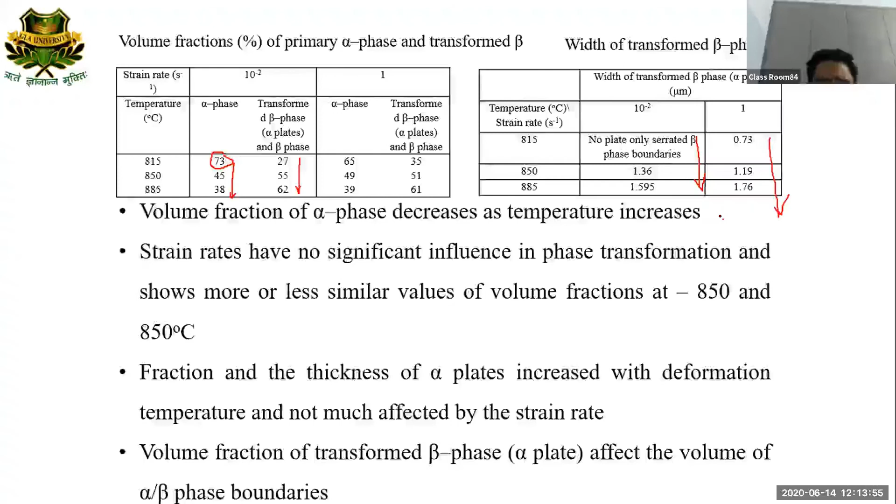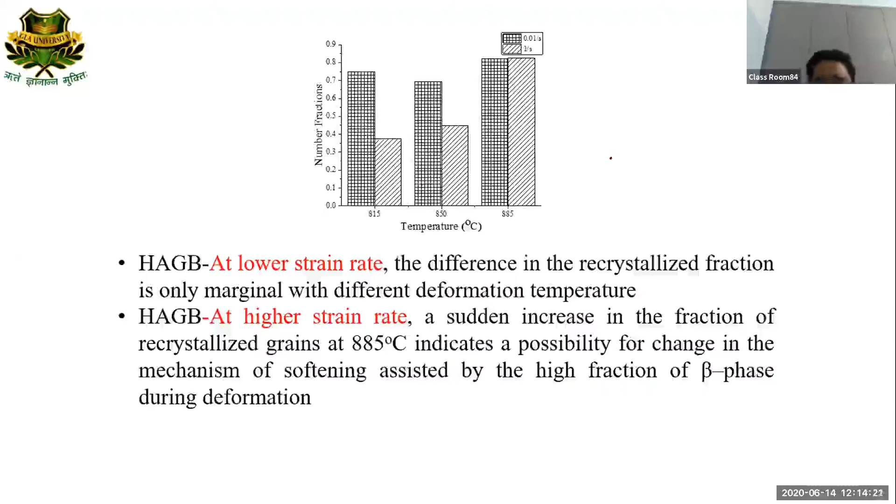Okay, so if we measure the width of these alpha plates or beta plates, then we can see that it is increasing a little bit as we move towards the beta phase. Okay. So some rigorous analysis is done on this microstructure, and here you can see the number fraction of high angle grain boundaries. Some EBSD measurement was done on selected samples, and from the EBSD measurement I have plotted the high angle grain boundary fraction for all those samples. Okay, so we have calculated some information from here. Later on, we developed the grain orientation spread from the EBSD measurement.

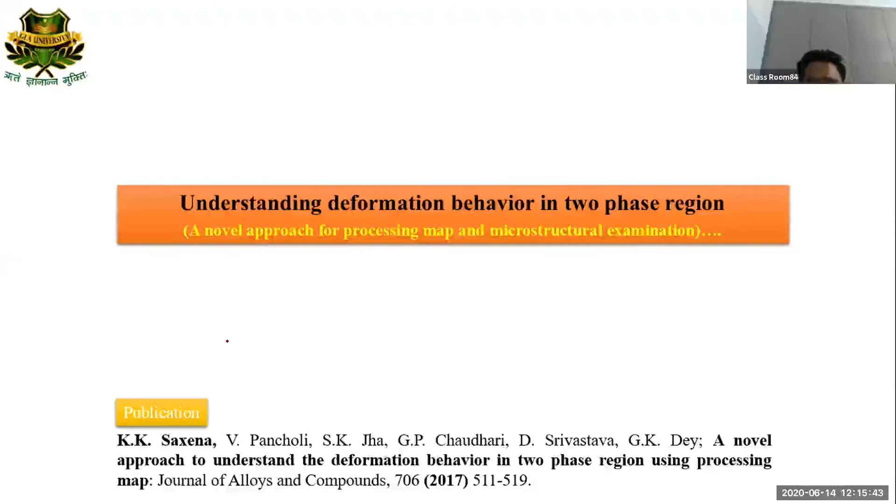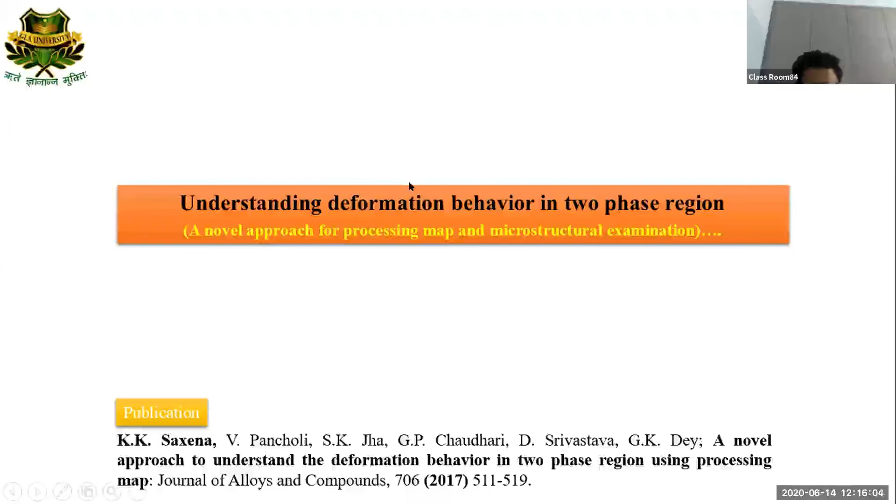Okay, so I'm stopping my talk over here and we'll open the session for question and answer, because a lot of work is there and some of you may be interested to know more, so you can Google or visit my Google Scholar. You will find a lot of work related to zirconium hot deformation, focusing on this particular two-phase region. Okay, so thank you for listening to me, and the session is open for question and answer.

Thank you, sir, for such an enlightening session on metal forming process and hot compression process. So, as you said, this session is now open for the question answer round, and we have some hands raised. So I'm unmuting one by one. Mr. Mahendra, please ask your question. Hello, Mahendra. Yeah, please go ahead with your question.

It's a very nice session, sir. Actually, I got more information from you. My research work is also related to hot compression, hot deformation behavior. So, thank you. I have a few questions, sir. So, the first one is how to differentiate the DRX grains and DRV grains in an optical micrograph.

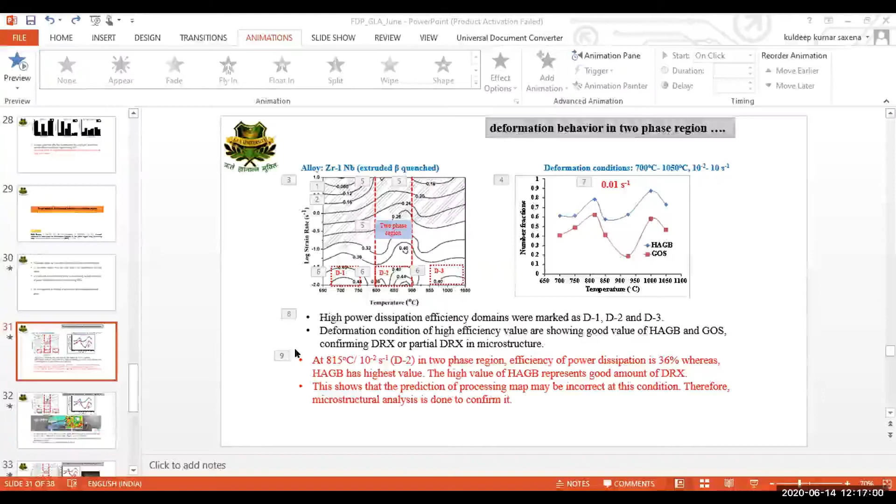Okay, so it is a very, very good question. For optical, you can take a feel of DRX when you are not feeling any kind of stretch in the grain.

Okay, so you can consider those grains are DRX. Moreover, the detailed information you can avail from the EBSD scan. From the EBSD measurement, you can define the DRX grain in a very efficient way. So I will recommend that EBSD measurement is highly required to segregate your DRX as well as DRV.

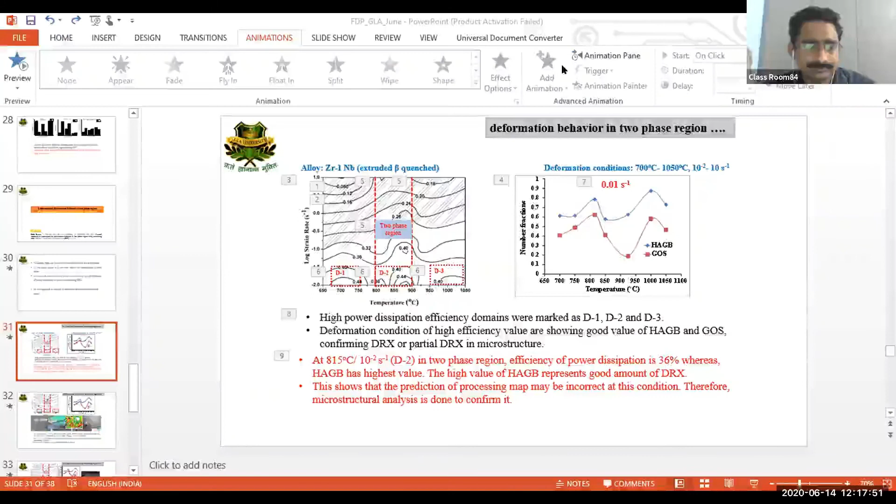Because I have stopped my talk at this particular location, and further slides are very much informative slides. Whatever question you have. Okay. So in those further slides, I have, just the second slide is on the screen, I think. So if you see, these are some EBSD measurements, and from those measurements, I have segregated this particular alpha phase or beta phase or kind of DRX.

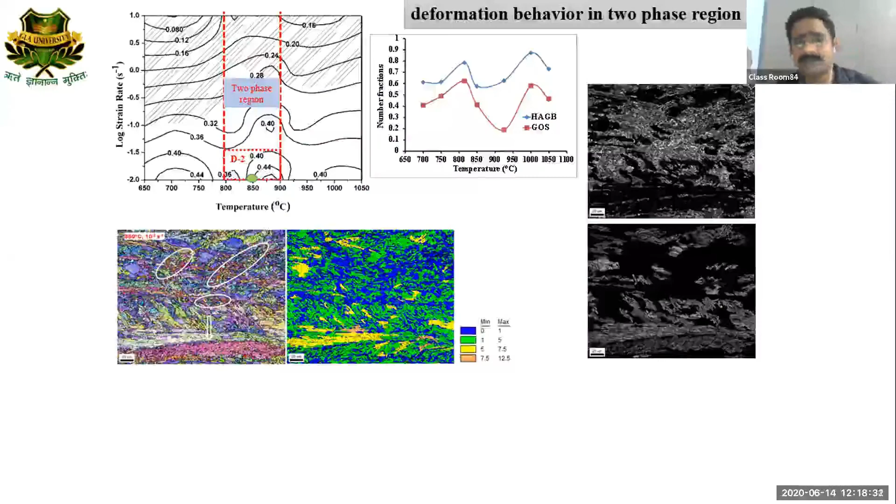Okay, so here on this right side black picture, you can understand these are the alpha phase and recrystallized in mode. Whereas in the lower picture, on the right side, you can see plate-like features are there. So it is a kind of transformed plate. So with the help of this EBSD measurement, we can do such kind of analysis. I hope I could answer your question.

One more question I have, sir. Yeah, please. From the flow stress curves, can we know that the DRX and DRV are taking place during a hot deformation? From the flow stress and strain curve, we can predict, but not confirm. We can confirm only when we have the validated microstructure analysis.

A lot of literature is available that if you are having the peak point and then the flow curve, after strain hardening, is decreasing, or flow softening is there, we normally use that to say DRX may happen in the deformed microstructure. But along with this softening, along with this DRX, sometimes some kind of instability may also exist. For this, you can see some published papers.

You will be very clear how we can get an idea from the flow stress and flow strain curve. Because normally in hot deformation, we have three kinds of flow behavior. One is known as strain hardening, another is known as steady state, and the third is known as flow softening. Steady state normally predicts DRV, but when you have flow softening, meaning your curve starts decreasing after the peak, then you can assume DRX may be existing in the deformed microstructure, but it is not sure that only DRX is existing.

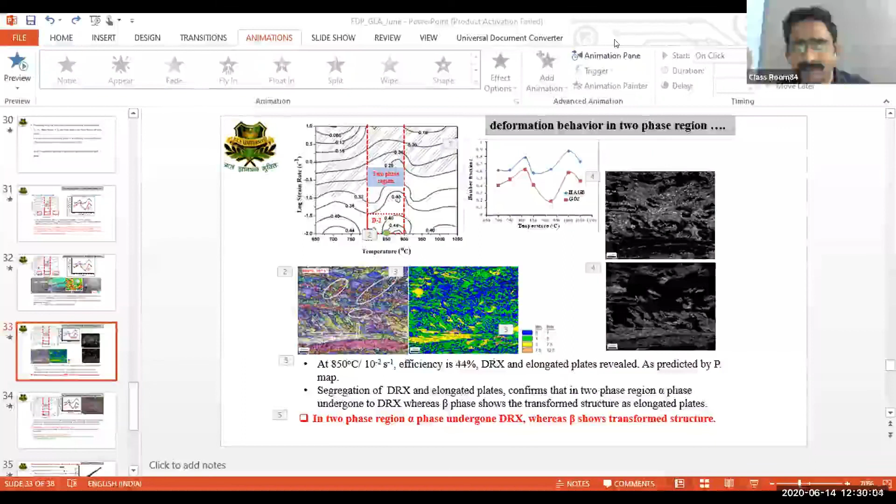Kuldeep sir, your lecture was very good and a lot of information was there pertaining to the development of the processing map. I have a few questions. How do you find the sine hyperbolic curve, sir? This equation was there in the constitutive equations, the third one. There you have mentioned the sine hyperbola of alpha and your flow stress. So how do you plot that one?

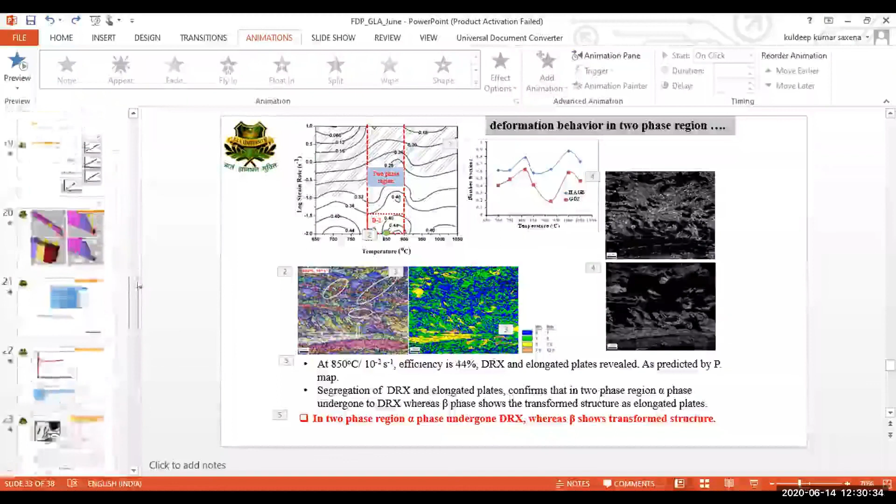Actually, your question is not clear to me. Can you please repeat in some other words? Generally, you need to find the Q value, the activation energy. So for finding this activation energy, you need to take the sine hyperbola alpha sigma, and then 1 by T on the other side. You will take these two variables and then you find out. But how will you find this sine hyperbola alpha sigma?

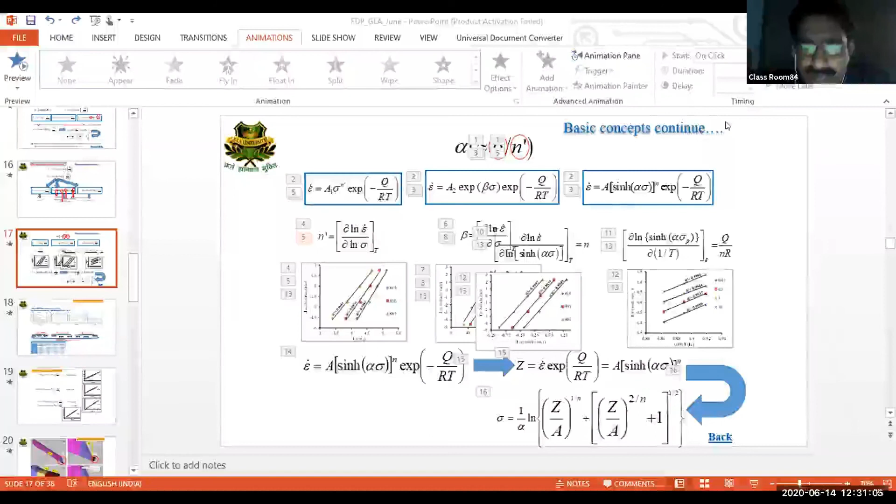Okay. So alpha sigma, if you have focused on my slide, how we get alpha, I have explained. On your screen it is written alpha is equal to beta by n'. Am I right? Yeah. That is fine. So beta we can get from the exponential equation, which is the constitutive equation part 2. And n' we have calculated from the first equation. Here on the screen you can see the extreme left is the first equation, the middle is the second one, and the hyperbola is the last on the right. So from the first one I have calculated n', and beta I have calculated from the middle one. By dividing these two values, we can get the value of alpha, which is known as the stress multiplier. When you multiply the value of alpha with the flow stress, then you have the value of alpha sigma. Am I right? Is this the answer to your question?

Yeah. Fine. Okay. Another question I have: while developing this processing map, you have mentioned that during the experiment you used a thermocouple to measure the temperature of the specimen, isn't it? So have you done the adiabatic temperature correction? I have done it. In one flow stress curve you have seen one dotted curve. Those dotted lines are the adiabatically corrected flow stress, and I have also told that I am not going into the detail of adiabatic correction, but we have done all adiabatic corrections.

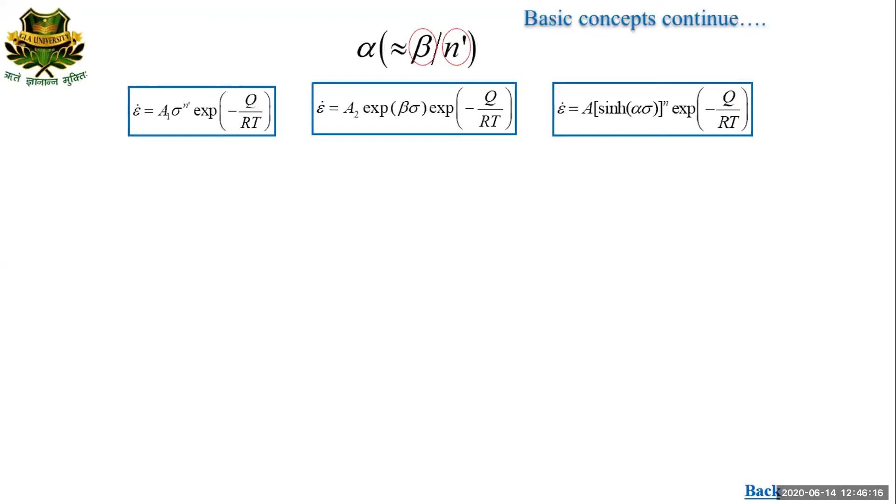In addition to this, you said for one sample the cost is 10,000 rupees. Actually, for industrial purposes, a few agencies are charging 10,000 plus GST. For academic institutions, they are charging 5,000 plus tax. So for the same EBSD, what would be the possible cost for one sample? Actually, for EBSD every institution has its own charges. You can talk to me personally. I could be helpful for your EBSD characterization as well as for Gleeble deformation. Thank you, sir. Okay, welcome. Be in touch.

The motive of this kind of FDP is to share knowledge about where the equipment facilities are and how we can do some kind of collaborative work with some agencies, some groups, some institutions.